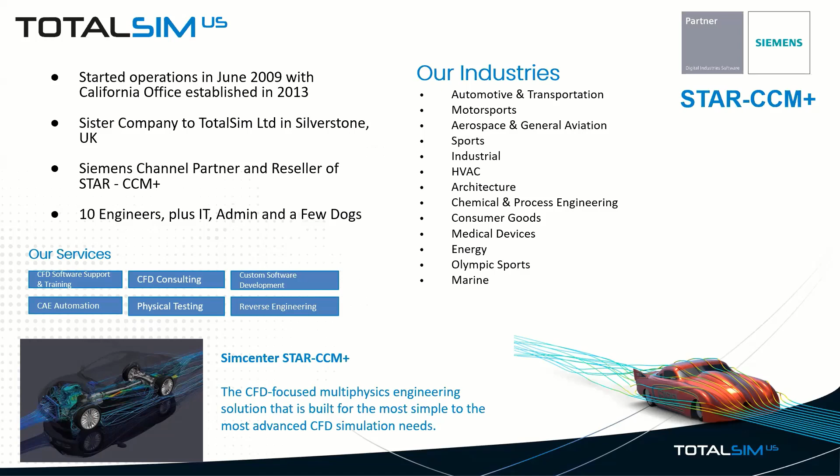Our speaker today, Greg Padgett, has been a vital member of the TotalSim team since 2011 and brings extensive expertise in top-level motorsports. Greg graduated from The Ohio State University with a bachelor's in mechanical and aeronautical engineering. He's our go-to expert for testing new tweaks to our CFD codes and methods, and his work with NASCAR and championship-winning GT and prototype series sports cars has been instrumental in developing our internal multi-car drafting capability. And these capabilities are actually used by every manufacturer in NASCAR and NASCAR R&D today.

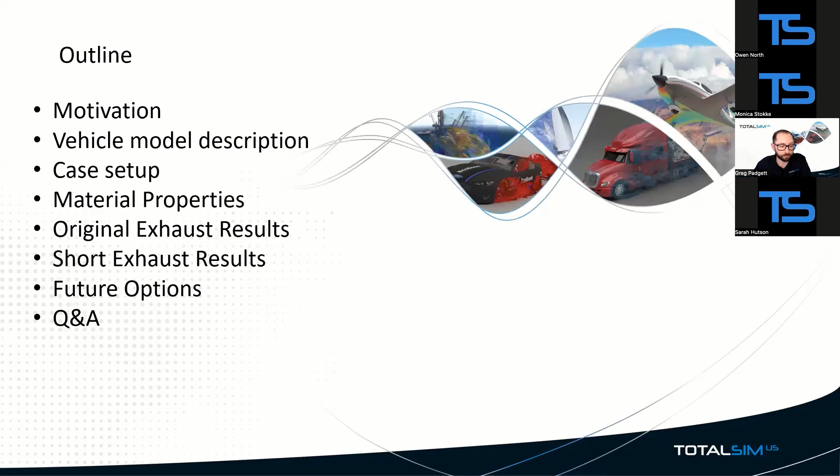So NASCAR moved from their Gen 6 to what's now known as the Next Gen back in 2022. And when they did that, they went from a sort of open floor design style NASCAR model that had been used for decades at this point. And they hit their stride with this new flat floor model and had a whole new design that came up with that whole new front end, underfloor, back end.

And with any new radical car change like that, there's obviously always going to be challenges. And NASCAR has been meeting those challenges as they come and continually making the car more robust and maintaining its racing capability while doing all this at the same time. One of the concerns that had popped up for just comfort purposes and controlling temperatures was cabin temperatures.

And there's quite a few sources of heat now on this next gen model that hadn't previously been a concern. With an open floor previously on the Gen 6, there was a bunch of air that would just flow into the car and carry a lot of heat away.

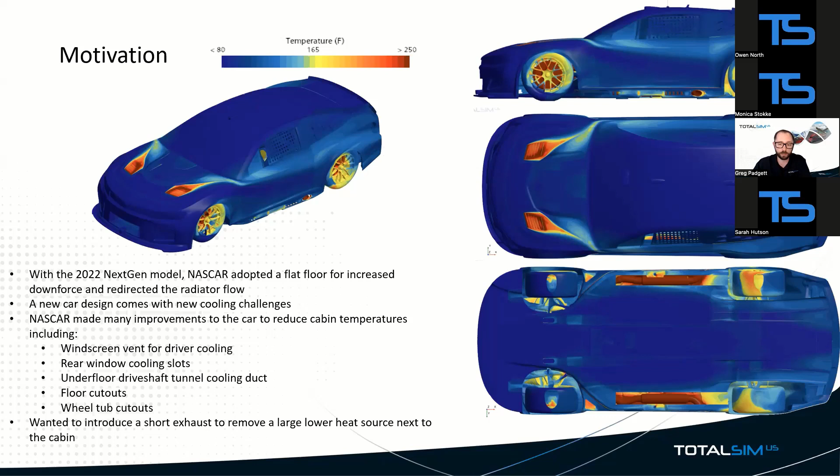But when you go to the higher performance flat floor models, now suddenly you have to route exhaust through rocker boxes and along the sides of the vehicles. And that leads to a lot of heat buildup, and it becomes a heat management challenge.

Another consideration was the radiator ducts that had been moved to the hood, and those were pumping hot air across the top of the car, across the A post, and some of it was getting pulled into the cabin.

So ever since the car has come out, NASCAR has continuously been making this car more robust for heat management, and they've done things like add the window NACA to help cool the drivers, changing how the A post window has a design to flick away the hot air.

They've gone through and made changes to the floor to help try and vent all that hot temperature out away from that exhaust, openings in the floor to try and provide as much cooling capability as they can to help maintain those temps or mitigate those hot spots and hot temperatures. But it's obviously going to be a challenge, and they've done a lot of work.

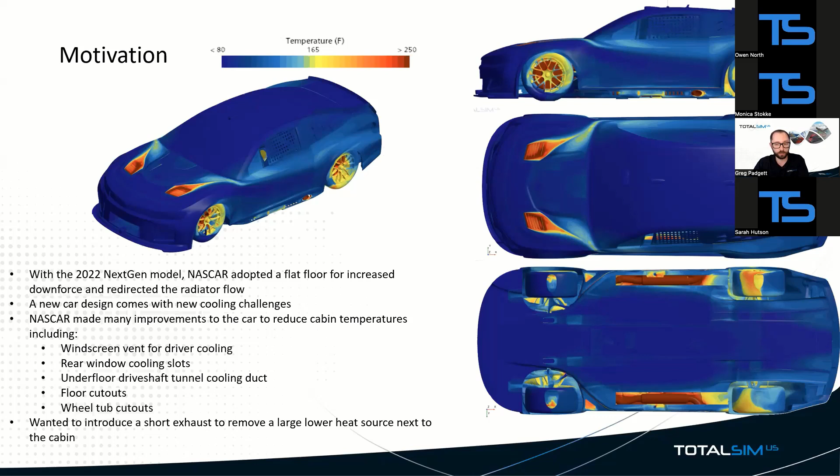But one of the things they wanted to change with this was to move from a long exhaust to a short exhaust to try and get a lot of that heat rejection removed from the model or from the car.

So all this work was done in STAR-CCM. At the time, it was version 2306. And I have a bunch of stats up on screen so you can see sort of the settings we were running at. This was done at a street course setup. So this was done at 60 miles an hour, one of our standard very large domains around the car. We were doing this steady state, but we were doing it with conduction, convection, radiation, all that present.

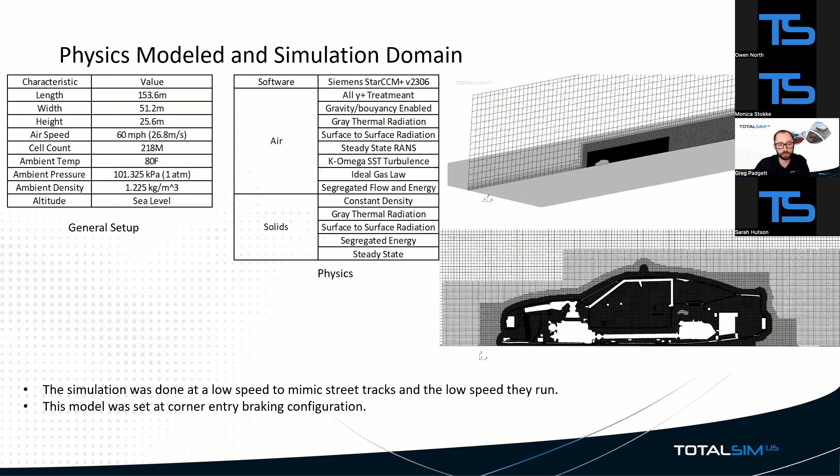And we were modeling a lot of solid components in this car. So it wasn't purely an airflow based model. We had all sorts of parts in here that were solid. And I'll get to those here in a second. But some of the other things that we had to model in here was what a proper heat soak on the engine bay and the car itself would look like. So we had to set up a bunch of different temperatures to adequately capture that.

So we have an engine block that's sitting at 300 degrees Fahrenheit, front rotors that are up over 1,000 degrees, calipers that are heat soaked up to over 300 degrees Fahrenheit, rear rotors sitting there at over 800 degrees. And then the big consideration in this was the exhaust itself.

We did not set an actual exhaust temperature, but what we did instead was we set the exhaust flow going through the exhaust pipes coming in from the headers. So we set that 1,100 degree Fahrenheit flow, and then instead of saying that the exhaust is just simply 1,100 degrees or 800 degrees or some average temperature, we let the airflow inside there determine the convection and then the conduction through all the materials, and then how that convects and radiates out from the external surface of all those exhaust surfaces.

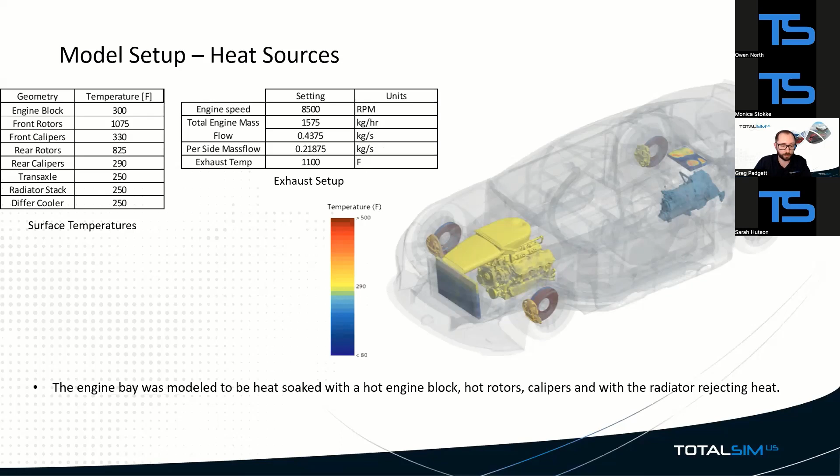As I was saying, with all the materials that we had to keep track of, it wasn't purely just the exhaust. And that accounts for the first 4 or 5 of these materials, such as Inconel and various versions of stainless steel and stainless steel insulating foil and insulation mats and radiation shielding and reflective films and all that.

There's a lot of other parts in here, such as what the carbon fiber and the carbon fiber core materials were, so that we had an appropriate heat conduction and convection and radiation coming off those for any heat that's heat soaking into those. And all those have their own properties. All those have things to track along with those. And since we're doing radiation, we have to track all the reflectivity off those as well, and the transmissivity. Fortunately, we weren't doing any of the plexiglass or glass here to add another layer of complications.

One option that was available that we did not do was solar radiation, to see how much hotter things would be on a sunny day versus a cloudy day. But that is an option that could be done. We just didn't do it in this case.

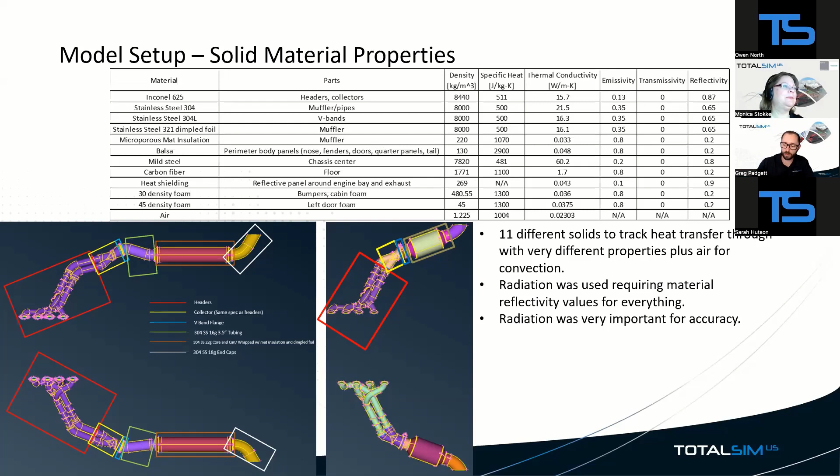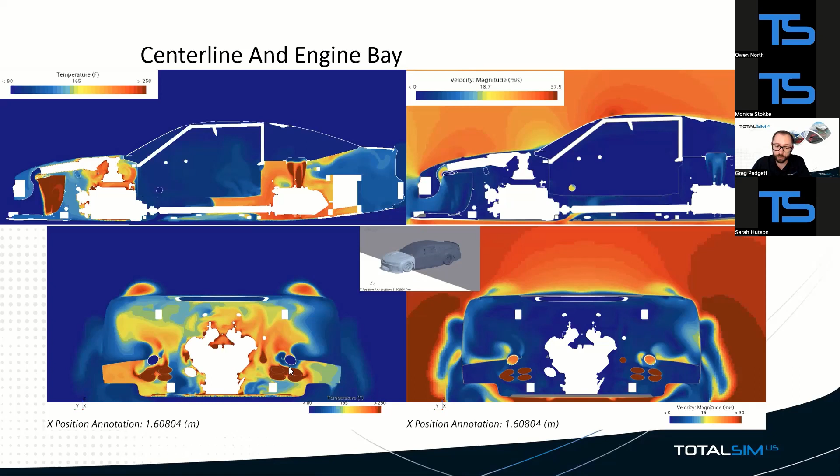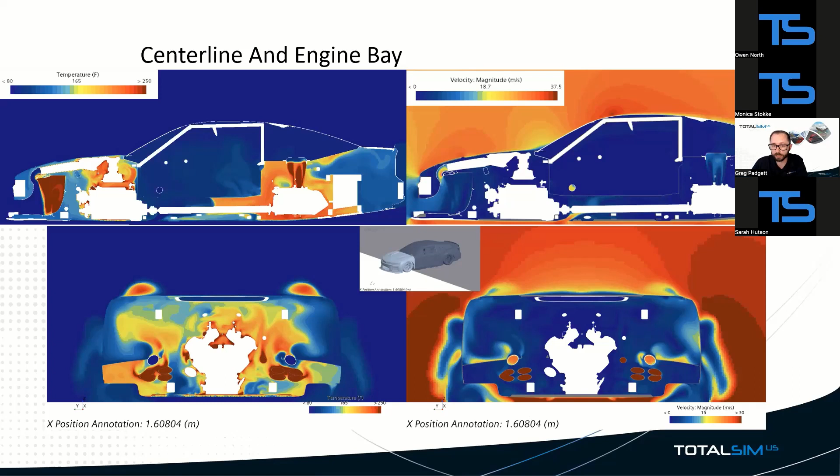Now, if we look in an X cross section and we're looking a little bit in front of the firewall behind the front wheels, you can see the hot exhaust right here, and you can see just these plumes of hot air basically filling up the engine bay. There are two little circles right here that you can see. Those are exhaust cooling ducts that NASCAR designed and built into the next gen model so that it can pull cool air from the front of the car and direct it right back to the collectors on the exhaust. So once they basically get back into a plenum space, there should be a clear source of cool air blowing across the exhaust and helping vent all that heat out.

If we look a little bit farther back, this is looking behind the front firewall, maybe 6 or 12 inches behind that firewall. And this is where one of the big challenges comes with trying to cool these exhausts. So even though NASCAR had put in a floor cutout, and that helped relieve some of the temperature buildup that was happening inside those rocker boxes, these closed volumes here, it's a hard fight to win, just because in a straight condition, you're basically fighting against these wheel wakes that are sitting here.

So you have nice strong flow on the bottom and you have fairly strong flow a little bit away from the car, but it's difficult to try and cool the exhaust with that wheel wake present. So there were a couple things they wanted to address, and one of them was getting rid of that cutout, though it had helped on the long exhaust. They wanted to no longer have to rely on it and have something that was cooler and more robust in the end.

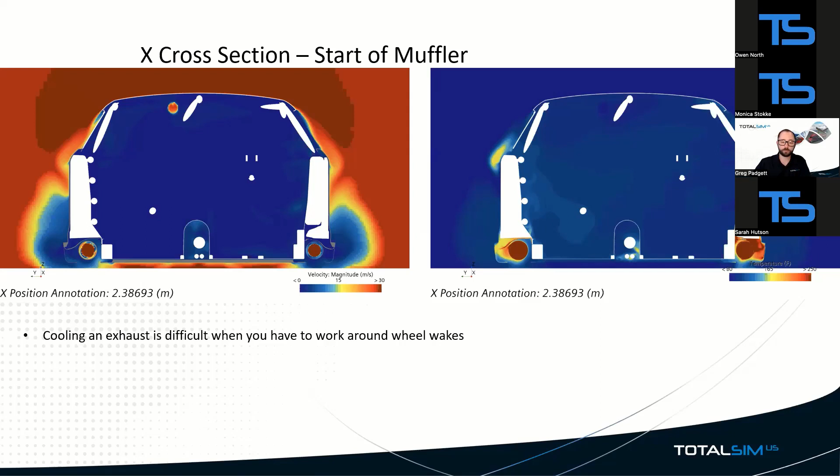This is a plot that came out of STAR. What we did was took the exhaust assembly for the headers all the way through the collectors and into the tailpipe, muffler, and exhaust exit, and pulled off a surface average temperature down that entire length of exhaust. And up here where the headers start getting all that exhaust gas, while the inside of that pipe is seeing air that's 1100 degrees, once it's reached the exterior side, we're up at around 840 degrees.

Roughly in this position right here is where that cooling flow from the nose blows into the collectors. So you can see there is some cooling that's happening. And once these collectors come into a single pipe, a little bit more mixing, a little bit more turbulent flow right there. So we've got more heat transfer onto the pipe itself. So that's why you see that spike come back up.

And this other dip right here is where on the side of the car we have some vents. And this is one of the places where the hot air can exit. So we saw a little bit more heat transfer there, cooling off the exhaust. But then we don't have a whole lot of cooling down the rest of it. There's some there and it's getting cooler. But this is one of the things that NASCAR is working to adjust.

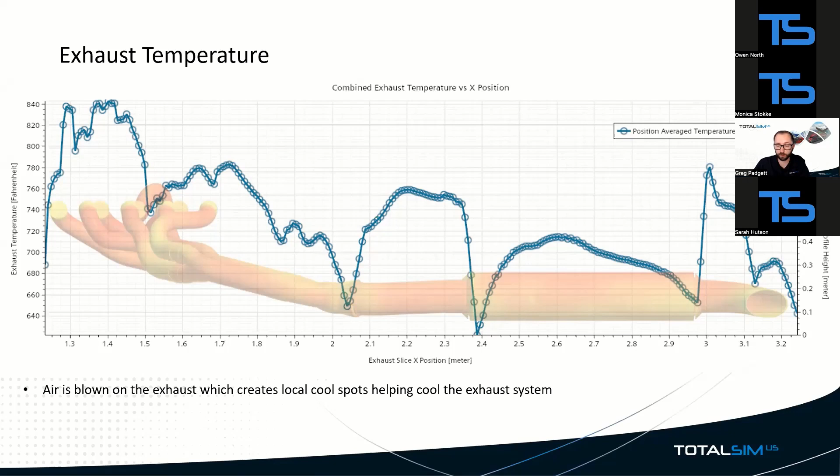So NASCAR was able to take these cars to the track, get some track data, and they were able to take some FLIR images, so looking at the infrared surface temperatures on the vehicle. And this is for the same setup between what was run on track and what was done in the simulation. And all these surfaces that you see here were modeled as thick surfaces, so they had full heat conduction and convection from one side to the other. So in this case, for the cockpit, from the underside up through the floor, with all those material properties being taken into account.

So initially, when they had run up here along this frame rail, they were seeing peak temperatures up around 130 degrees. Back here to the side of the driver's seat, you can see sort of opaquely here, they were seeing about 120. Over here on the other side, about 122 as well. And up here, similar idea.

So we don't have exactly the same matching temperatures. The CAD model versus anything that was on track and physically built, we're going to have slightly different models. This doesn't have all the welds in it. This has different air gaps in it for manufacturing tolerances and things like that. But we're seeing the same sort of trends, the same sort of hot spots in the same locations. So to us and NASCAR, that was a good indication that we had a firm handle on what the actual conduction paths were, and we were going to be able to help them address their heating concerns.

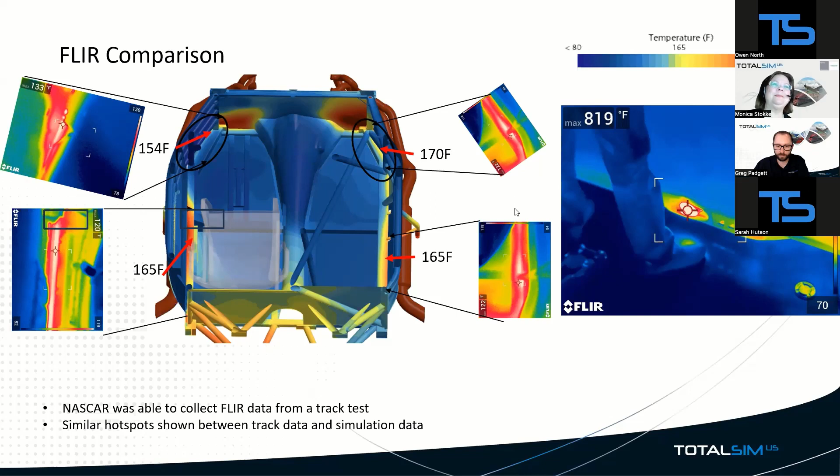All right. Thanks everyone for answering those questions. And now we get to the fun animations. So there we go. So this is showing some streamlines coming out of that cooling duct that was routed all the way back into a plenum area where basically all the exhaust is run.

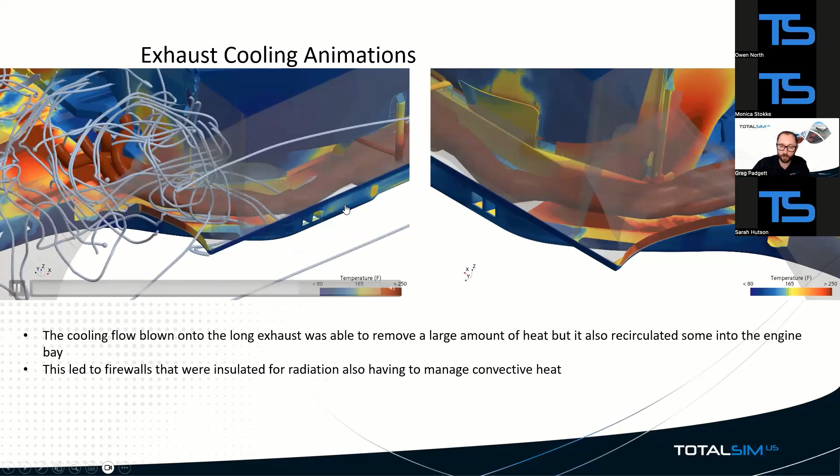And what was happening due to this muffler being back here, it was partially blocking up some of the flow from this cooling flow, not being able to get past the muffler. And that was basically cooling off the front of the exhaust, but not adequately cooling off the back end of it, which is where some of those temperatures on the side of the cabin were coming from.

And because there's a bit of a blockage there, some of the flow that comes in swirls around, picks up some of that collector and header temperature, and swirls it back into the engine bay, which is what you see with some of those hot spots back here on the firewall. So while the firewall is insulated for thermal radiation due to the collectors themselves, NASCAR wanted to go through and help remove some of that additional convection heat transfer that was happening there.

And fairly similar setup between left and right. There's a little bit of difference in the headers between the left side and right side of the engine. So we see actually on the right-hand side a little bit more heat transfer into the firewall than on the left-hand side.

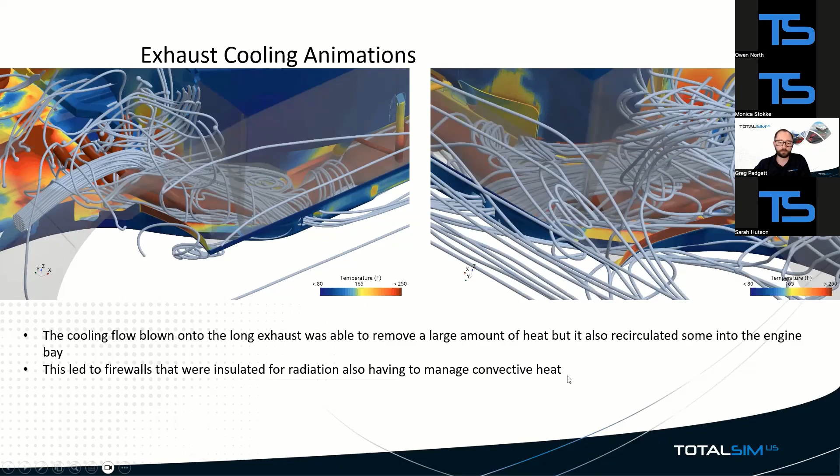So I'll start off with the short exhaust, looking at its initial results on the same sort of streamlines, and then we'll kind of back up and look at some of its effects on the rest of the cabin around it. So when NASCAR went through and redesigned this, this slightly translucent surface through here is one of the crush panels on the side of the vehicle to help for driver safety and car performance.

And what they have here when they redesigned this is they've increased that volume all the way around this muffler and the tailpipe exit so that all the cooling flow that comes in here has adequate opportunity to go through and cool off all this exhaust and then actually exit out the vents without having to recirculate into the engine bay. And if I go ahead and play those animations, you can see the flow coming in, a little bit of recirculation around the exhaust, but then a lot of it blows right out those cooling channels as intended.

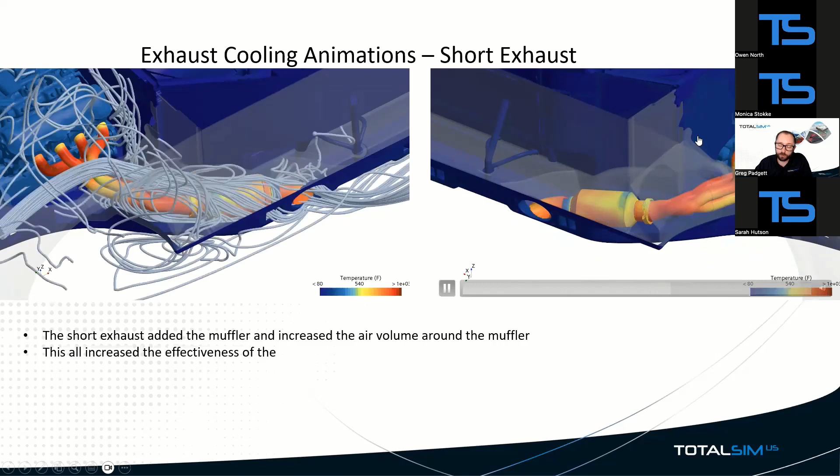There's a lot less going back into the engine bay, and you hardly see any sort of heat or high temperatures here on the firewall. So it's doing a really good job with this new redesign in opening up that space, letting the cooling ducts do their job, supplying cool air to those exhaust pipes, and in the end, helping provide cooler sidewalls.

So one of the other changes that becomes really obvious when you look between the original exhaust and this new short exhaust is its effect on the side of the cabins. So if we have the exhaust present here, you can see basically all the radiation and convection effects on the side of the cabin: there's this long region of just hot surface from sitting next to the muffler.

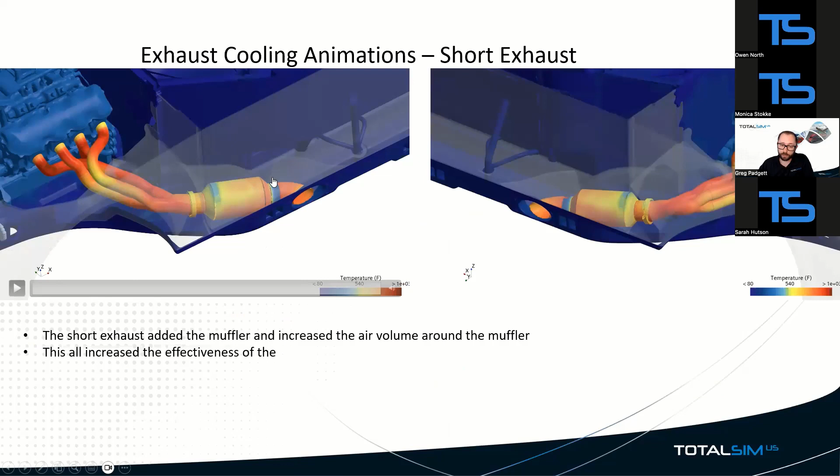Actually, if I back up here, I want to point out another feature, this closeout panel. This also helps all the airflow that goes in here exit out the side. So if I flip back here, that closeout panel is basically right here. Now that all that hot flow is blocked from going down in the rocker box next to the cabin, there's a massive reduction in temperature and heat transfer through that cabin surface.

And with all that additional volume around the exhaust to help that cooling air circulate around there, you see much lower temperatures across the firewall as well, now that the cooling flows much more effectively venting out, and there's less recirculation. So that ended up being really successful.

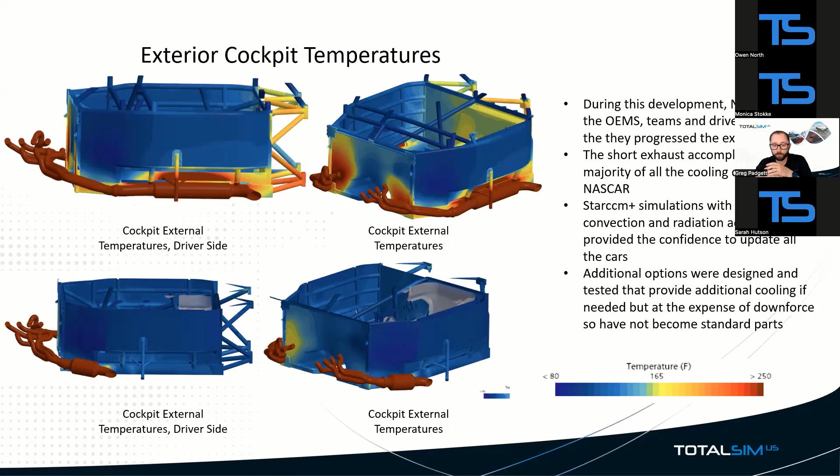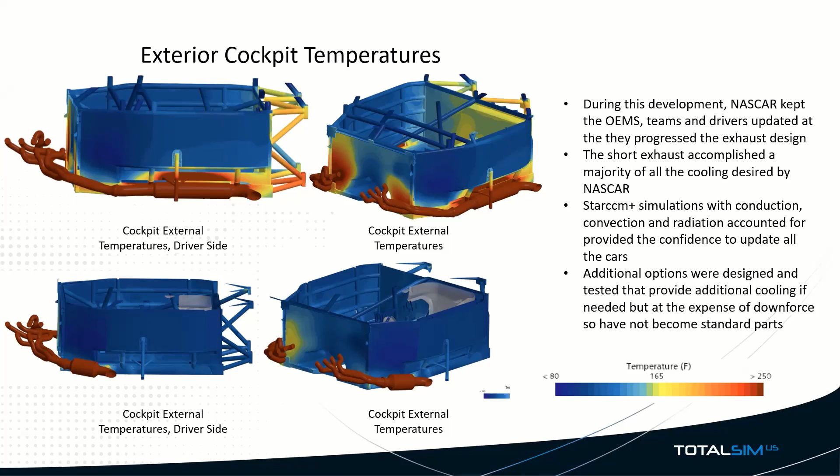And when NASCAR was going through all these developments, they were frequently providing updates to the teams, the OEMs, the drivers, and all that. But before they wanted to take it to the track, they came working with us to go through STAR-CCM to get as much confidence as they could in this exhaust design before they built it and put it on track. And they did end up putting it on track at a Phoenix test, and they effectively saw all the things that we were seeing here in the models. They saw all these temperature reductions.

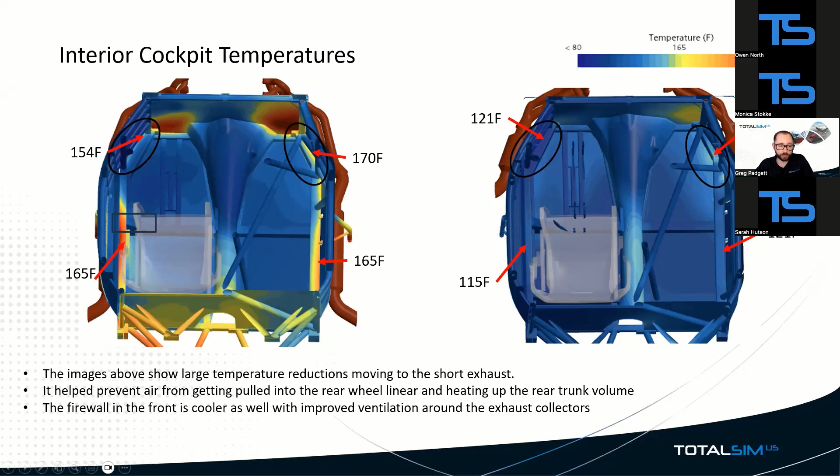And running this through STAR-CCM really gave them the confidence to go through, build this, test it, and hopefully not have to show up to track with 10 or 15 different options to swap out. And they had the confidence to go through with this, and they ended up shifting all the cars to this design.

When they went to the track test, you do always want to come with a couple designs just in case. And although everything we were showing with the short exhaust was positive, in case real world testing or manufacturing differences or anything like that was hiding something unexpected, they did show up with the option to cut out a vent hole inside the floor again, or supply extra cooling ducts, which would pull some strong flow from the splitter or underwing and supply that back to the exhaust as well.

In the end, the short exhaust basically gave them everything they were looking for. So all the modeling we did in STAR-CCM basically bore out once they took it to track and did some physical testing on it. The additional options that they had, while they worked and while they were useful, they went into the test knowing that those ones were the ones most likely to have an impact on performance for the race car itself, whether it's more drag or less downforce, which they then saw at the track test.

So they have these options in the future should there be an exceptionally hot race day coming up for outdoor temperatures or anything like that, that could help reduce some of those temperatures as well. So in the end, they went only with the short exhaust, but came away with that design plus some other options for the future if they need them.